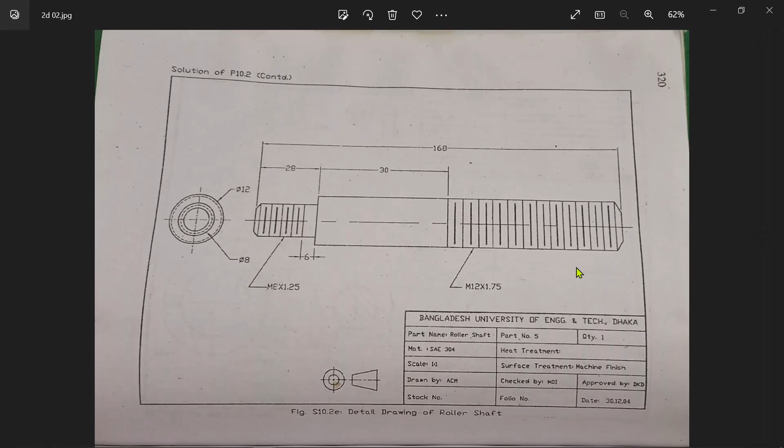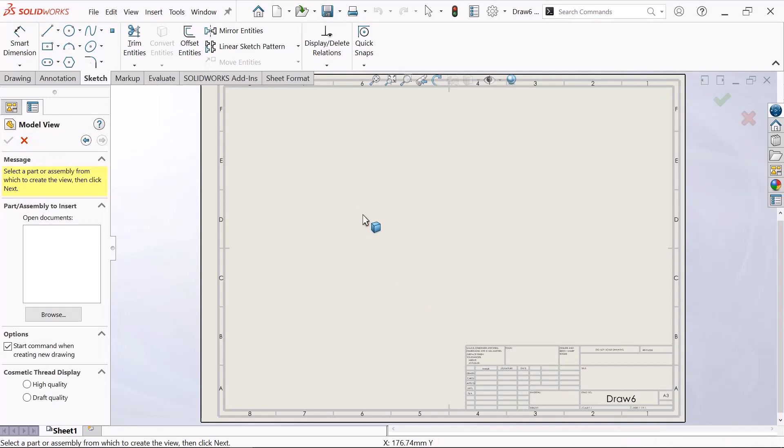Let's start. Go to this, click new, click 2D engineering drawing, and click OK. Now I choose A3 and click OK. Just click cancel.

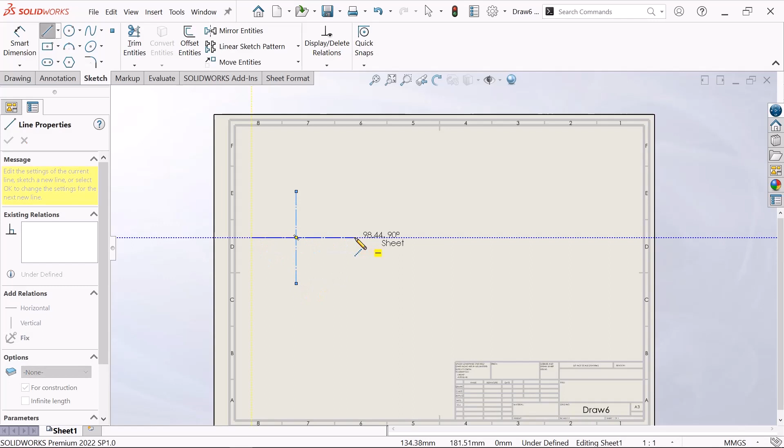Now at first I will go to this line and choose center line. Sketch center line from this point to this, and again sketch center line from this point to this, right click, select OK. Then click this circle, sketch circle from this point to this, and again sketch circle from this point to this, right click, select OK.

Sorry, this point will be the same. Yes.

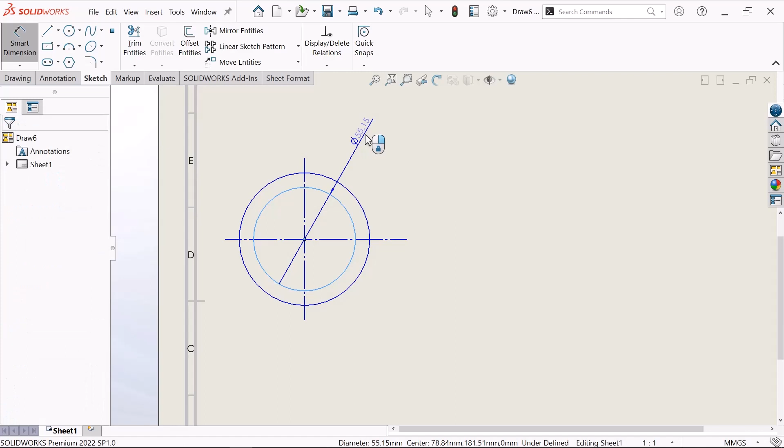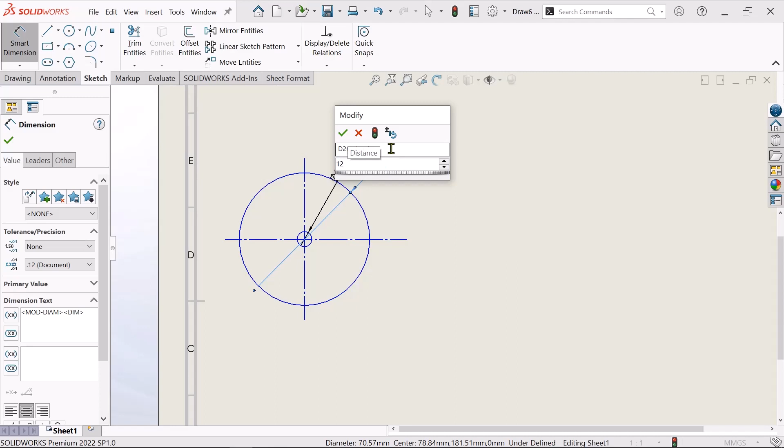Now go to smart dimension, make it 8 millimeter. Click enter. Again make it 12 millimeters. Click enter. Just right click and select OK.

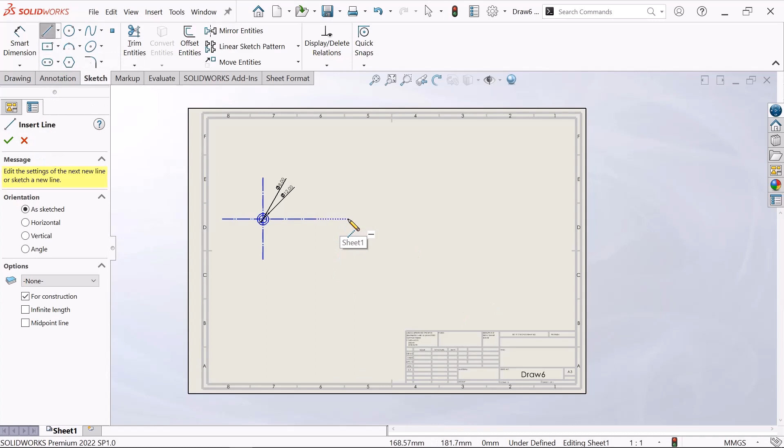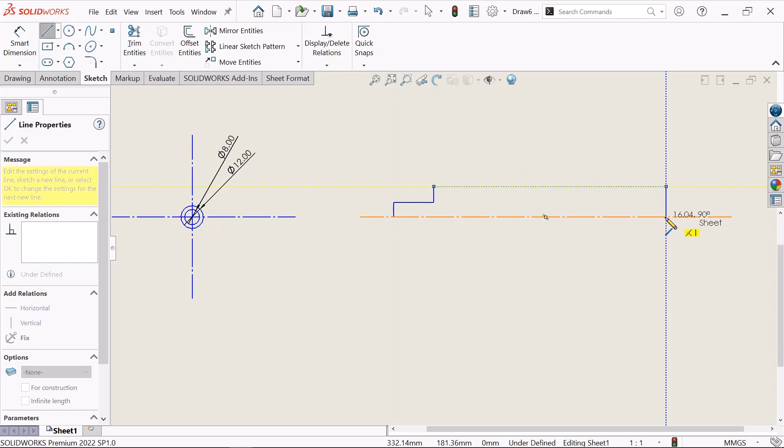Now I'll go to this center line, sketch center line from this point to this point, right click, select OK. Sketch a line from this point to this point, and this point to this point, and this point to this point, and this point to this point, and this point to this point, then select OK.

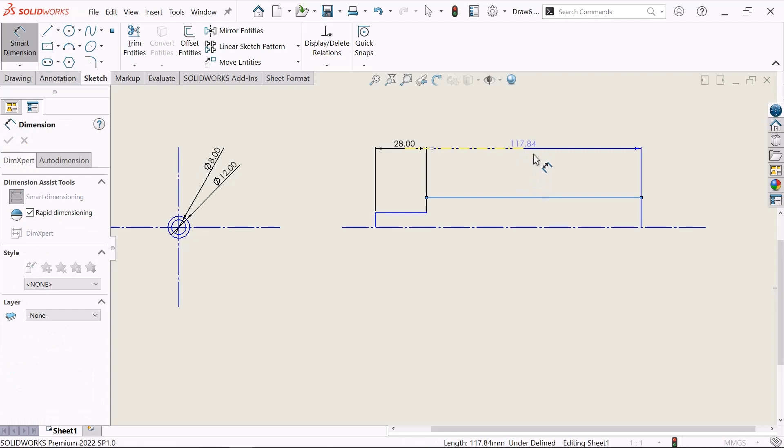Now go to smart dimension, make this 28 millimeter. Click enter. And make it 30 millimeter. Click enter.

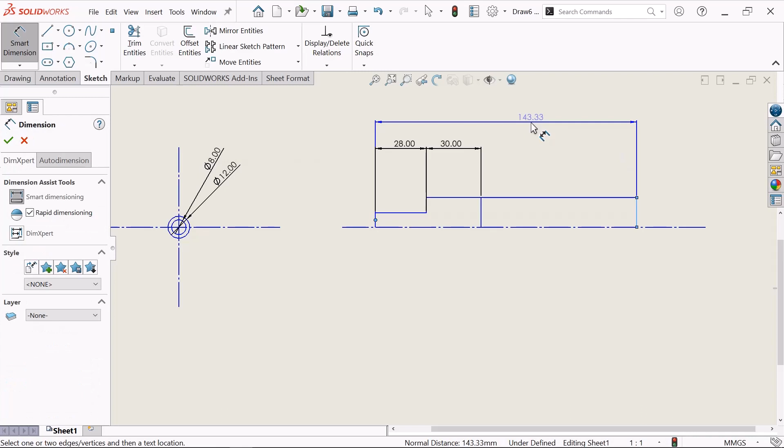Again sketch a line from this point to this point, and this point to this point, right click, select OK. Now click this line and make sure it is vertical. Click OK. Now go to smart dimension, make it from this point to this point, 168 millimeter. Click enter.

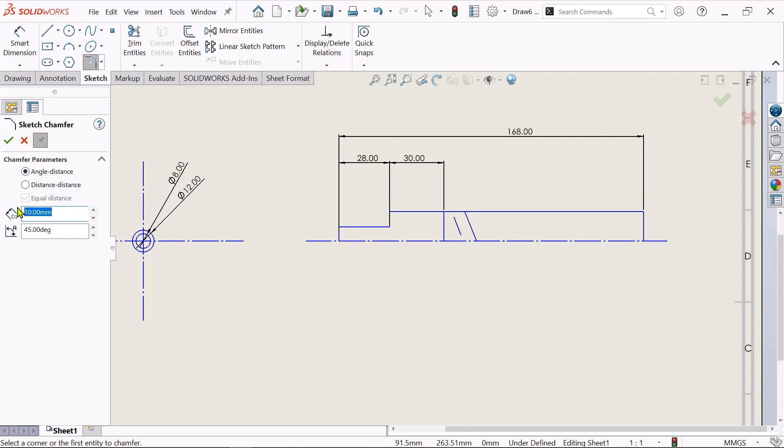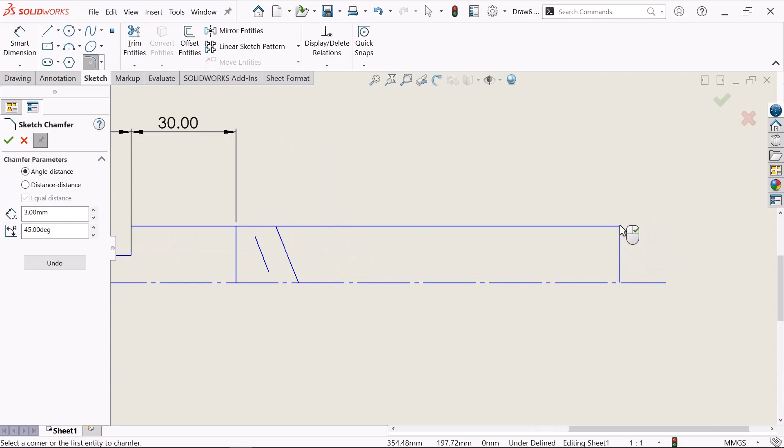Now go to this sketch chamfer and choose angle distance, make it 3 millimeter, click enter. OK, and angle distance 45 degree, choose this point. This is this point, click yes, and again choose this point, click this, and click OK.

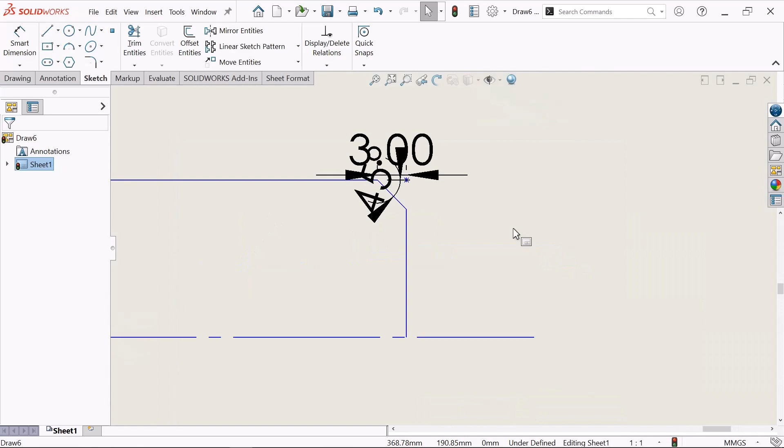Now just drag it for better understanding, click this, drag it, click this. Okay, and again drag it.

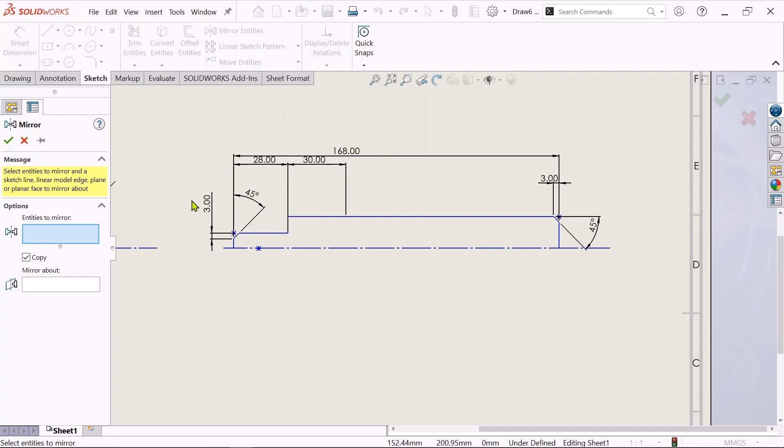Now I'll go to mirror entity. Just copy this, mirror this to this, all of this, and about mirror just click this line and click OK. Now see.

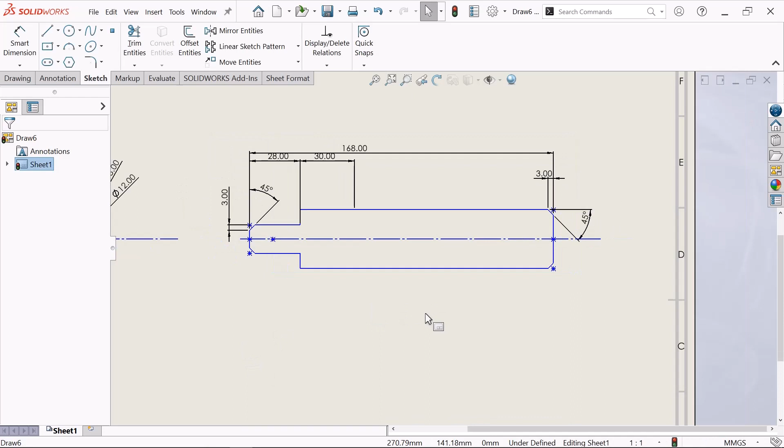Now just choose this line and sketch this line, this point to this point to this point, select OK, and again sketch line from this point to this point.

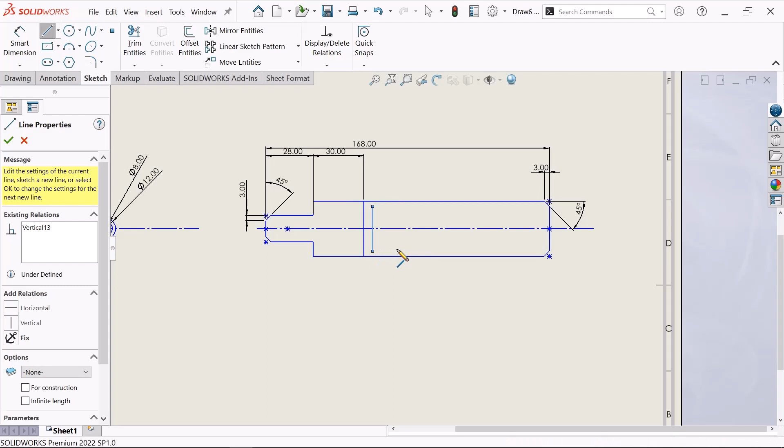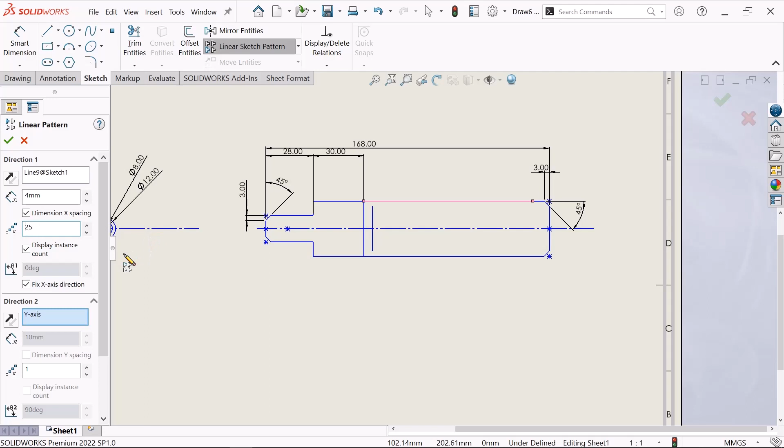Select OK. Now go to linear pattern and choose this distance, make it 4 mm distance, and make it 25 number of instances, and choose this entity to pattern. This is our entity to pattern.

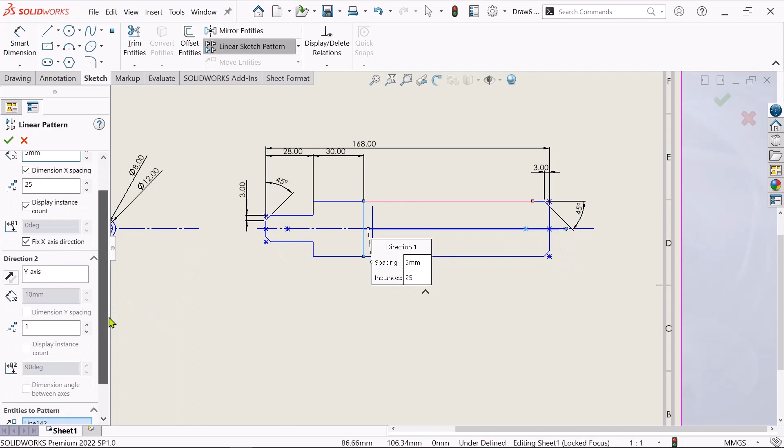Just keep it 5 mm, click enter. It will be until this, so just click this.

Now see, it is created. Now again I will sketch this. Just click this, right click and delete this.

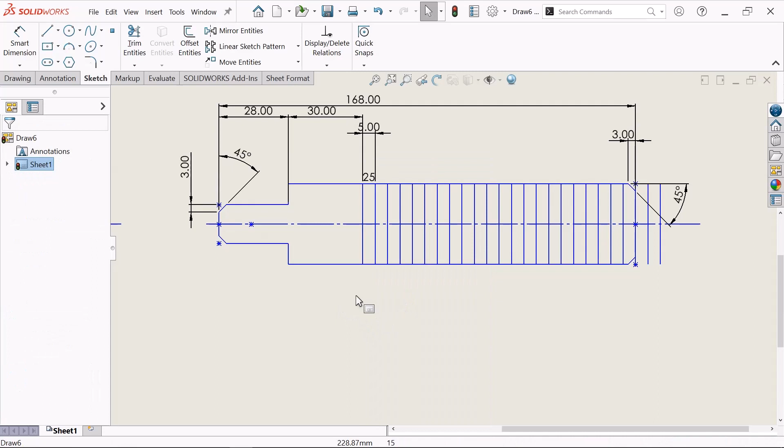Again I will sketch line from this point to this point. Right click, select OK.

Now I will go to this linear pattern. Just choose this. This is our line. I will choose this number 4, click enter. Sorry, I will choose this 5.

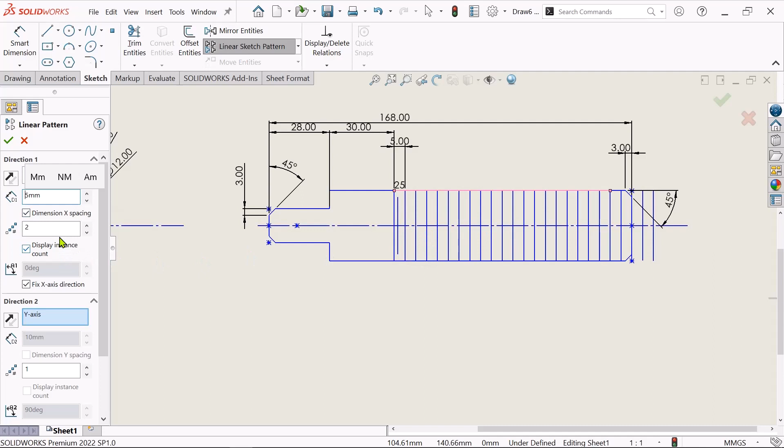Click enter, and I will choose this number of 25, click enter, and I will choose these instances to pattern. These are our instances to pattern. Click OK. Now see, it is made.

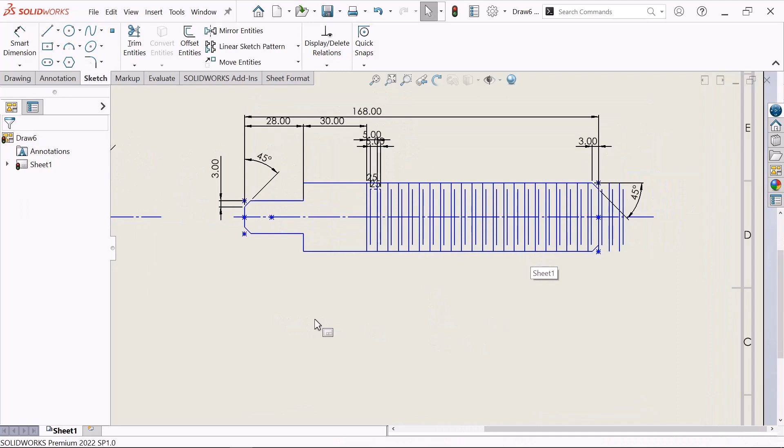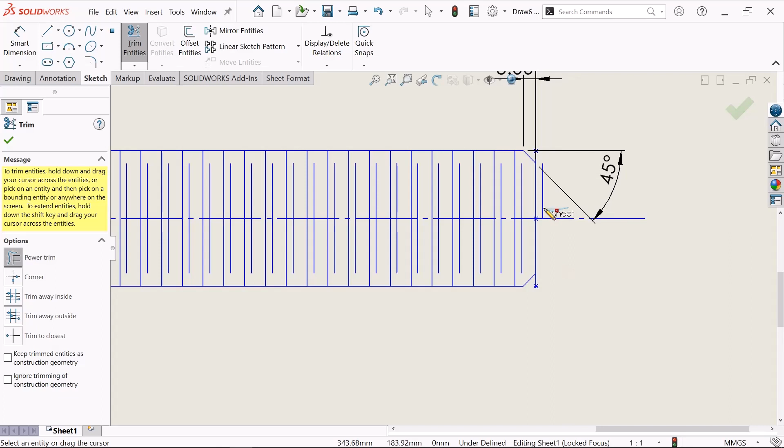Just right click and click OK. I'll trim the extra line. Click this trim, click until this, and choose this and this to this. Now click OK.

Click OK, and again sketch line from this point to this point to this point, right click, select OK, and go to this linear sketch pattern, choosing this distance.

I will make this number 5 distance, and keep it number of 5. I will choose this entity to pattern. This is our entity to pattern. It will be number of 5. Just click OK.

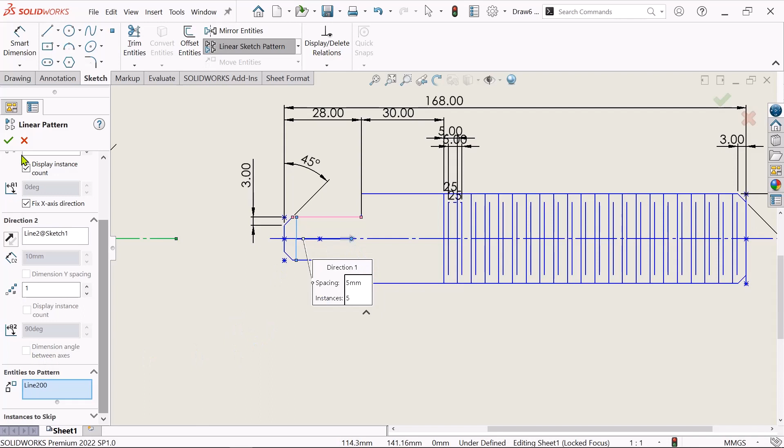Again I will choose this line, sketch line from this point to this point, click OK. Sorry, just delete it and choose this line from this point to this point, right click, select OK.

I'll choose this linear sketch pattern, choose this the distance. I'll choose this number of 5 millimeter distance, and number of 5. I will choose this entity to pattern. This is our entity to pattern. Click on this line and click OK.

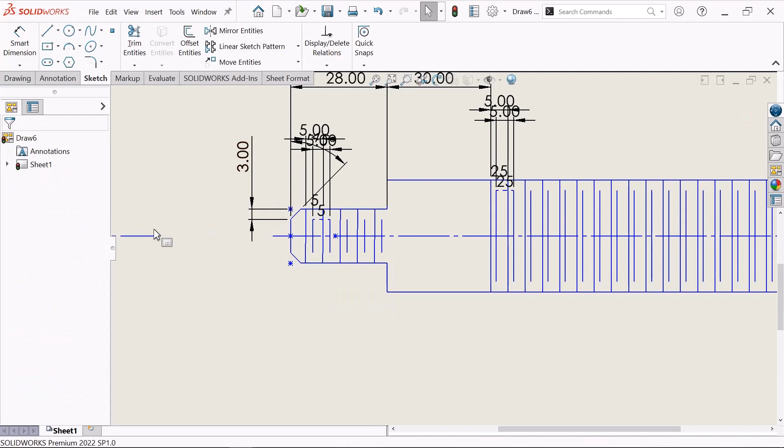Now see, our shape is created. Okay.

Just I will go to this sketch line, click this line from this point to this point and this point to this point, click OK.

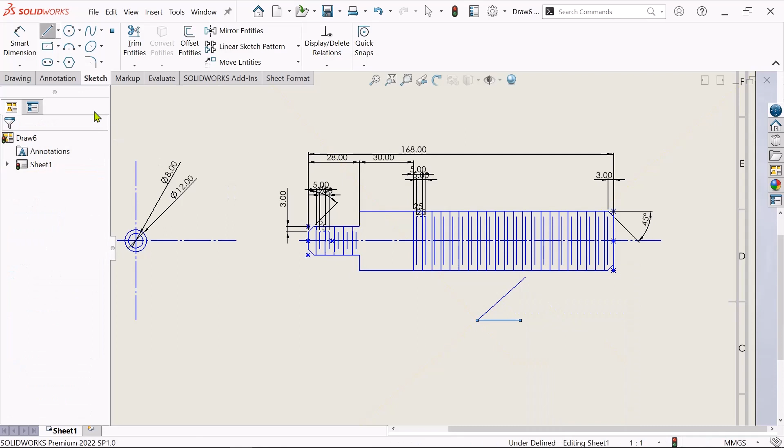Again choose this line from this point to this point to this, and this point to this, select OK.

Again I will choose this line from this point to this, and this point to this, and choose this point to this point to this point to this, right click, select OK.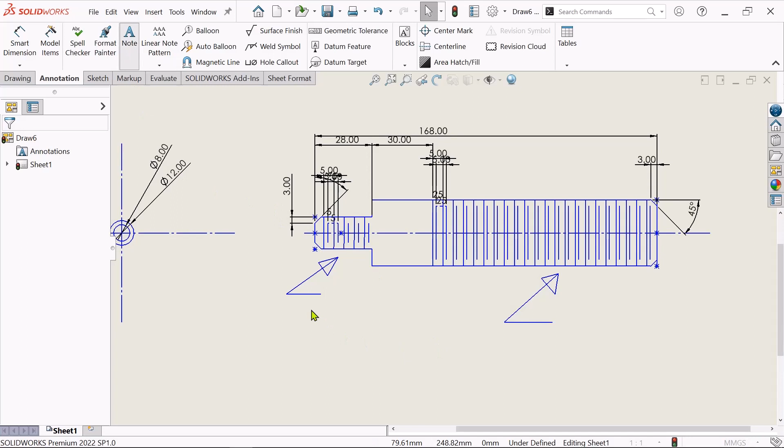Now I will go to this annotation and click this note, click here, and I will click this. It will be size M8 into 8.

Sorry, just back it, click back. Just click this, click 8 into 25, just click OK, and again click here.

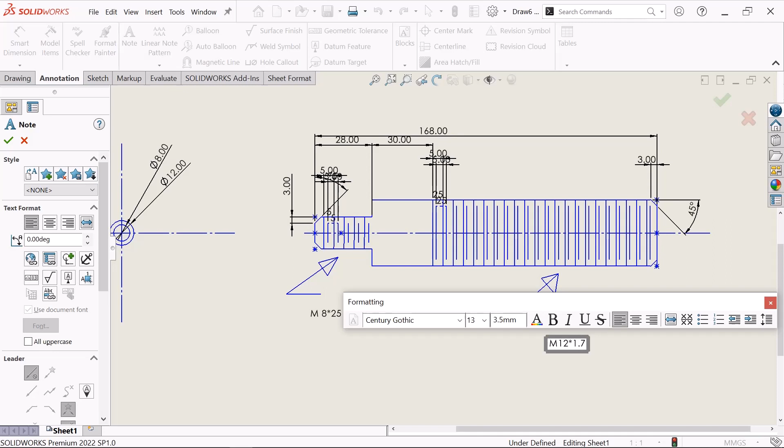And I'll write it M12 into this, click this, click 12 into 1.75, and click OK.

Now see, this is the shape created. Okay, 2D shape. Now go to this file and click save as.

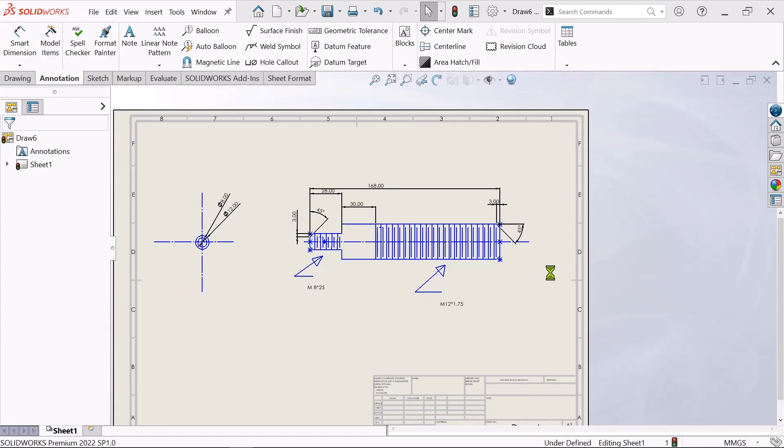Just I will make it, click save type file, choose this PDF, and click save. Yes, now it is making as a PDF.

Okay now see, just full view. Now see, it is created as a PDF. Okay, thank you for watching.